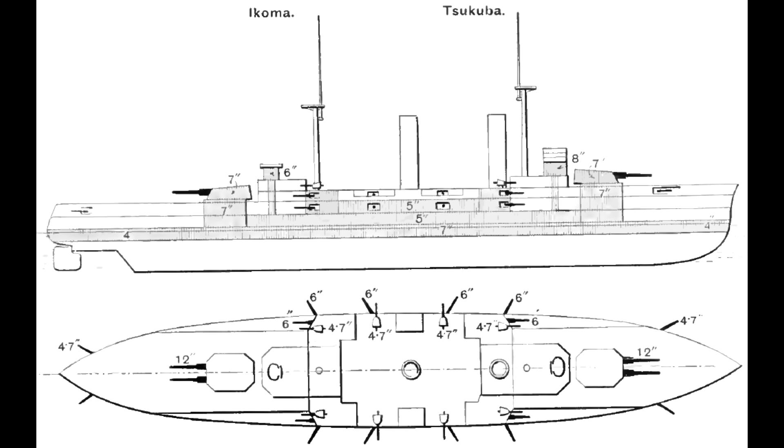Unlike the Japanese ships, though, which were very much simply larger and more heavily armoured cruisers, the US Navy design was labelled a fast battleship, and essentially traded off some armament, compared to the growing demand for all big gun designs, in favour of speed, with protection much closer to battleship than armoured cruiser levels. Imagine either an elongated Connecticut or a slightly less heavily armed South Carolina, for an example.

It was this latter idea which would gain more traction as the monster fleet proposal ran into the very real issues with political will and thus budget, and from 1904 through 1906, various options on the small fast battleship idea were sketched. Some were more like the Japanese Navy's enlarged armoured cruisers, others followed the more original elongated battleship concept.

As such, armament also varied, with some proposing a pair of twin 12-inch turrets, while the then Lieutenant Commander William Sims suggested a 23-knot ship with no less than 9 10-inch guns in 3 triple turrets.

However, as the true specifications of the Invincible class began to become apparent to people who weren't in the Royal Navy, views began to diverge once again, but now in completely different directions. In an interesting inversion of Fisher's justification for battlecruisers, some US Navy officers argued that an Invincible-style ship would be the perfect commerce raider, since the large numbers of smaller and slower protected and armoured cruisers used on overseas stations by most navies, and even some of the older battleships that were sometimes used there as station flagships, would be completely unable to deal with such a vessel tearing up the nearby merchant fleets.

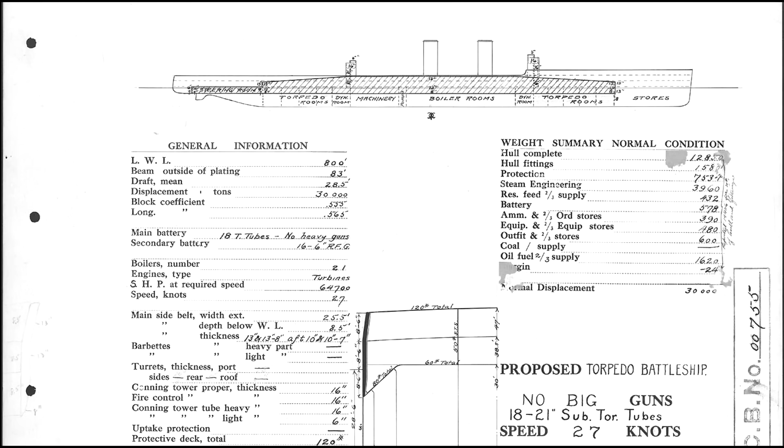Even the brief interlude of proposals for a large, swift vessel armed primarily with torpedoes, the so-called torpedo battleship, didn't change things that much, although it was concluded that the Invincible type was a better idea than the torpedo battleship, and both types relied on higher-than-average speed, but the Invincible could deliver almost as heavy a torpedo attack, plus it had the advantage of having big guns, and thus was more generally useful. It was, however, also asserted that a vessel with a still further reduced main battery and some more protection would be still more useful, and then you'd fallen back into armoured cruiser territory, and the US Navy wasn't building any more armoured cruisers.

Thus, advocacy for battlecruisers fell to the fringes of the US Navy officer corps until 1909, when, faced in part with clearer intelligence on how the Royal Navy actually planned to use its battlecruisers, plus the Germans starting to build their own and the Japanese Navy on the lookout for a design that suited their needs, and the Royal Navy, of course, itself continuing to iterate on the battlecruiser idea with new designs, the Naval War College finally decided that, in fact, the battlecruiser was a type of cruiser, primarily intended for scouting, screening, and pursuit of the enemy, rather than a type of battleship.

This statement of what to us might seem to be the blindingly obvious opened the gate somewhat once again, and coupled with news soon after of the keel laying of HMS Lion, a still faster and more heavily armed design compared to the 12-inch battlecruiser type, the US Secretary of the Navy soon began soliciting designs for potential battlecruisers from the US Navy itself. This came back in the form of half a dozen concepts that were designed to accompany the Wyoming-class battleships. They varied between 24 and 26,000 tons displacement, with 6, 8, or 10 12-inch guns in twin turrets, all with a speed of 25.5 knots and armour that varied between 8 inches all the way up to the 11 inches of Wyoming herself, usually with the number of guns scaling inversely to the thickness of armour.

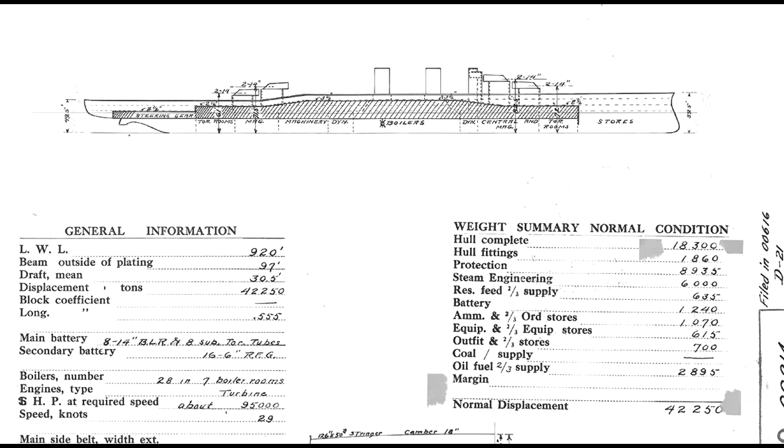This was to be trimmed down to 900 feet in hull length, with a range of 8,000 nautical miles plus the 24 hours at full speed, with a secondary armament increased from 5 inches to 6 inches on account of the fact it would be more independently acting, and it would have some torpedo tubes.

Attempting to fulfill this requirement yielded a somewhat shorter ship, although it was still 950 foot long, and weight actually ended up going up slightly due to the need for a more powerful machinery plant due to the somewhat lesser length-to-breadth ratio. Since this design only marginally improved the infrastructure issues, meaning that a single dry dock then being built at Pearl Harbor could just about take it, it was shelved.

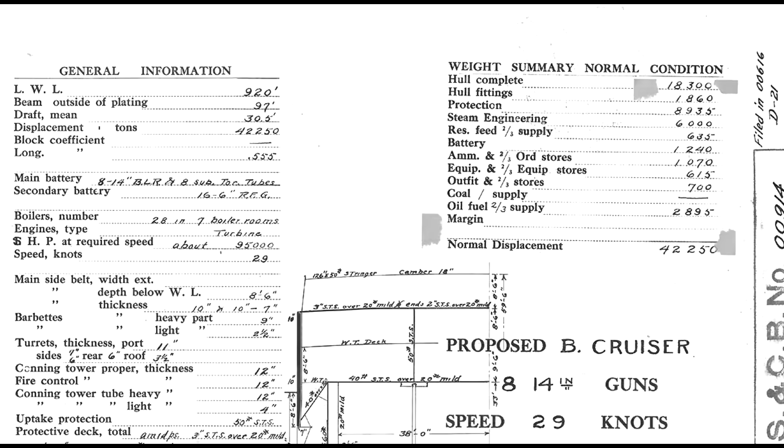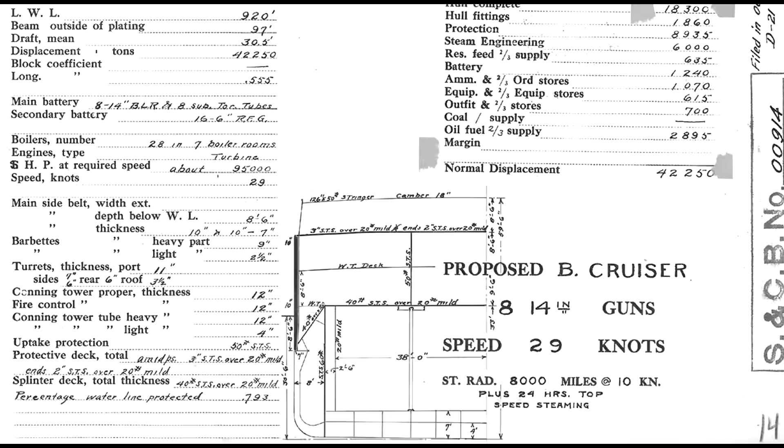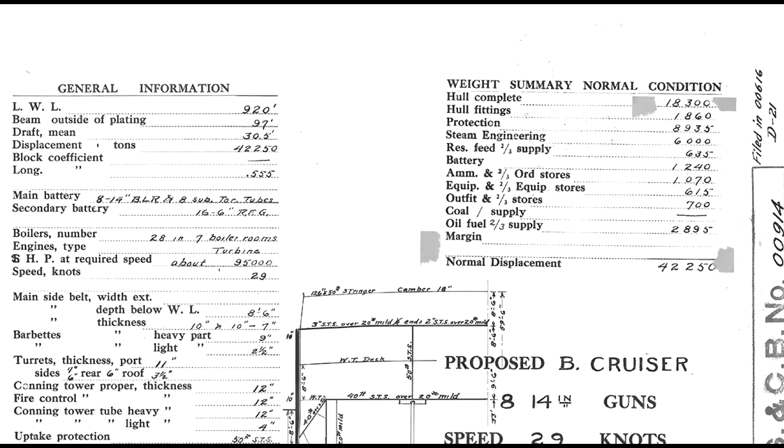One last sketch seems to have been made, which reduced the belt armour by 1 inch to just 10 inches, as well as some other small changes, which managed to drop displacement to just over 42,000 tons and length down to 920 feet, but this was still seen as far too large and expensive for the offered capability, and nothing further was done, other than a note left that the mission would shift from independent operations to long-distance recon and scouting for the fleet in the future, and armament of future designs was going to be either 10 14-inch guns, presumably in a Nevada-style layout, or 8 16-inch guns in 4 twin turrets.

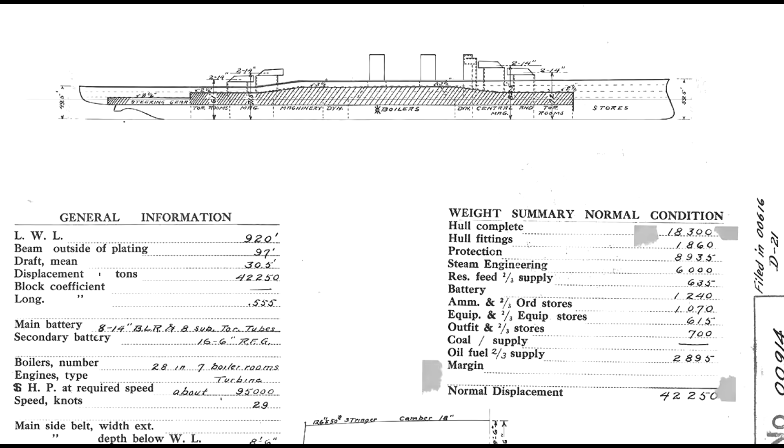Things died away a bit after this, but shortly after, World War I broke out, and battlecruisers were involved in many of the early actions, proving their capability of destroying smaller cruisers utterly. This made the US Navy's previous contention that fleet screens could be done by the cruiser fleet alone completely untenable, and the need for battlecruisers in said fleet screen became more and more obvious. Once more, the thinking split into 2 lines. In 1915, this resulted in what you might call the high and low-end designs.

At the upper end, there was another go at a full-scale battlecruiser, now armed with 8 16-inch guns. By significantly reducing the freeboard along the length of the ship, it was possible to avoid the need to make the armour part of the ship's basic structure, and so a shallow 13-inch belt between the turrets was tried, with a very heavy protected deck abreast the turrets and extending somewhat beyond them. The latter had 8-inch slopes and a 10-inch narrow underwater belt, while the 13-inch belt, as we said, remained between the superfiring turrets, over machinery for the most part.

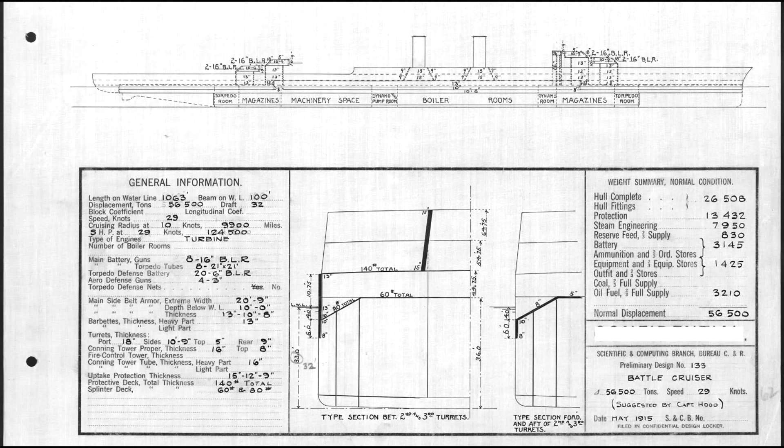Still capable of 29 knots, this new design came in at 56,500 tons and over 1,060 feet long. It was a couple of thousand tons lighter and considerably better armed than its most analogous predecessor in the 1912 design series, but it was still far too big and expensive.

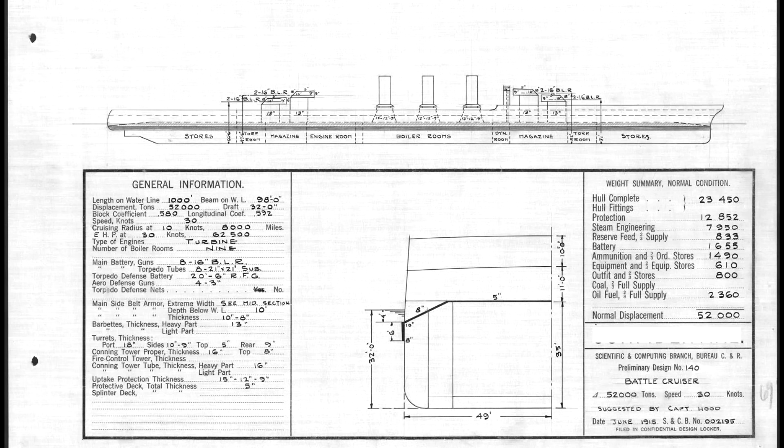An idea to abandon conventional belt armour entirely in favour of just running the heavy protected deck along the whole length of the ship, essentially making a gigantic protected cruiser, saved about 60 feet on length and 4,000 tons in weight, while pushing speed up by about a knot. But it was still far too large and had the additional problem of any hit on or above the waterline now being one that would potentially cause flooding, and at the very least some internal damage, and the ship lacked enough reserve buoyancy to stay afloat with just its underwater citadel intact.

At the lower end of things, however, was the idea of a battle scout. This had started off well in the cruiser category with a proposal for a top speed of 35 knots.

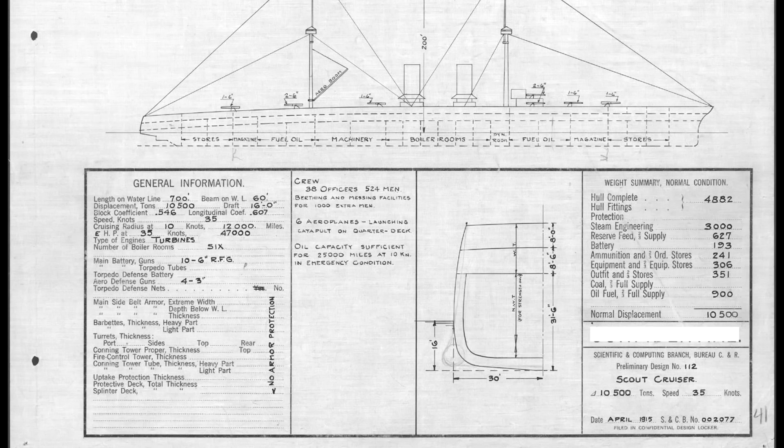And at the lower end of the series, there were designs of just over 10,000 tons with 6-inch batteries and armour protection that ranged from distressingly sparse to non-existent. But, as the near 3 dozen designs went on, displacement grew, and so did armament, with 4 12-inch, 14-inch, or even 16-inch guns considered as displacement headed up towards 20,000 tons, all with little to no armour.

As displacement climbed into the high 20s and even low 30,000s of tons, armament included up to 8 14-inch guns, and finally a degree of protection, between 4 and 8 inches of belt, depending on the design. Most of these designs were still aiming for 35 knots, although a few did drop this requirement to a mere 30 knots or so. At this stage, it was clear that the Battle Scout was beginning to converge with the full battlecruiser, and so they tried again with the Battlecruiser. However, the range requirement and the limitations of available boilers and turbines were again kicking the idea to the curb.

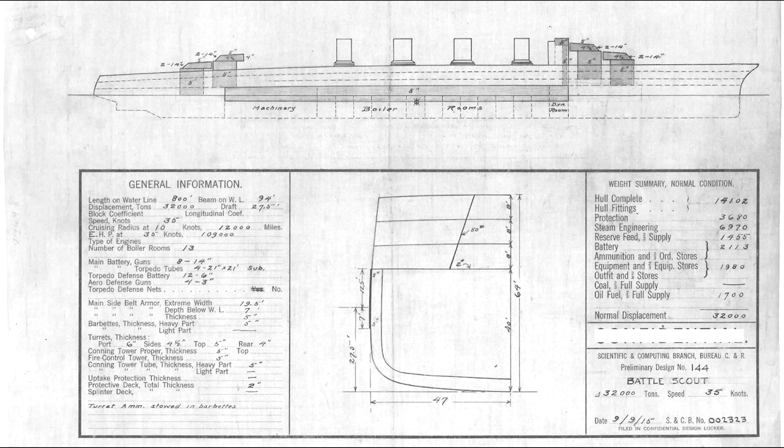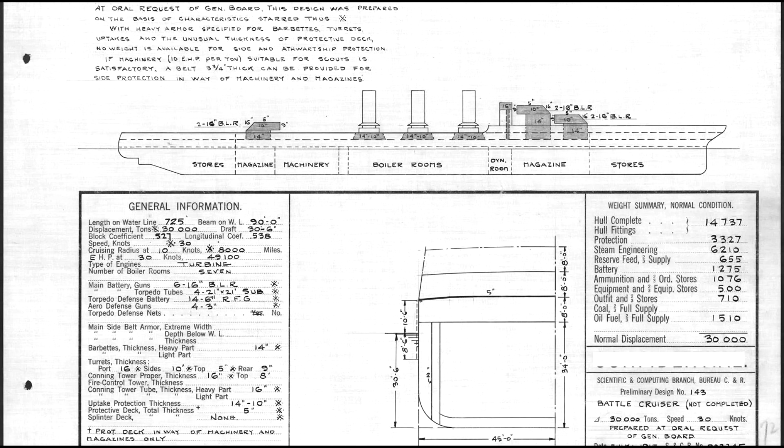On a similar displacement to US Navy battleships of the time, a design began to be drafted that aimed to be somewhat better than the approximately 27,000-ton HMS Queen Mary. An armament of 6 16-inch guns in 3 twin turrets was considered, with a 30-knot top speed and 5 inches of deck armour. Unfortunately, it turned out that with just that armament, the armour for the turrets, and the secondary battery in place, they ran out of displacement with exactly 0 belt protection.

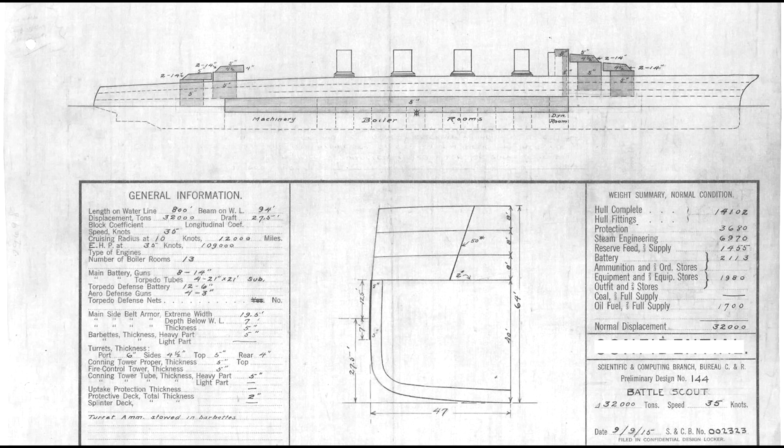Dropping the armament down to a roughly equivalent 8 14-inch guns and introducing a 5-inch thick belt, which would at least protect against light cruisers, still pushed displacement up to 35,500 tons. However, this general concept was still marked for further exploration, resulting in a 32,000-ton design which had 5-inch armour only over the machinery spaces, with a rather brave decision taken to abandon magazine protection entirely, thanks to storing all of the ship's ammunition in the barbettes, which themselves only had 5 inches of armour.

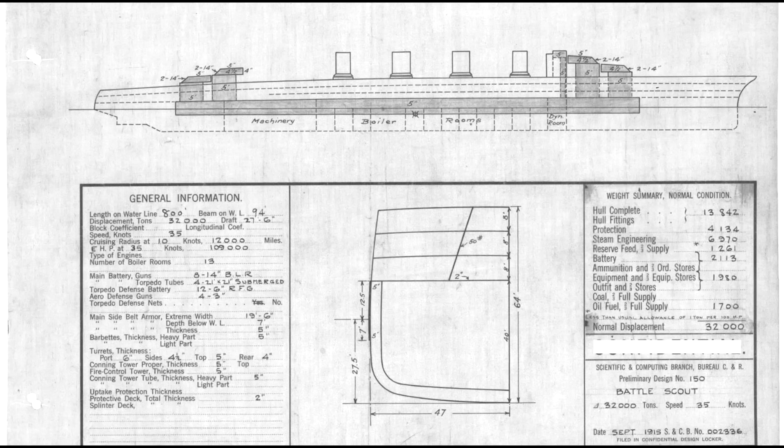Since this meant all the explosives were now well above the waterline and only behind 5 inches of steel, it was rather understandably hastily revised to include some underwater magazines, with the belt extended over them at the cost of significantly less reserve feed water and overall a more flimsy hull. Although the new magazines still only had 5 inches of armour, they were at least slightly harder to hit.

4,000 tons could be saved by switching from 14-inch guns down to 10-inch guns, or alternatively, if you stayed back at 32,000 tons, the use of 2 twin 14-inch turrets up front and a triple aft allowed the 5-inch belt to go all the way to the bow, while the use of a pair of quadruple turrets allowed a Gangut-style full-length belt bow to stern, although again it was just 5 inches thick.

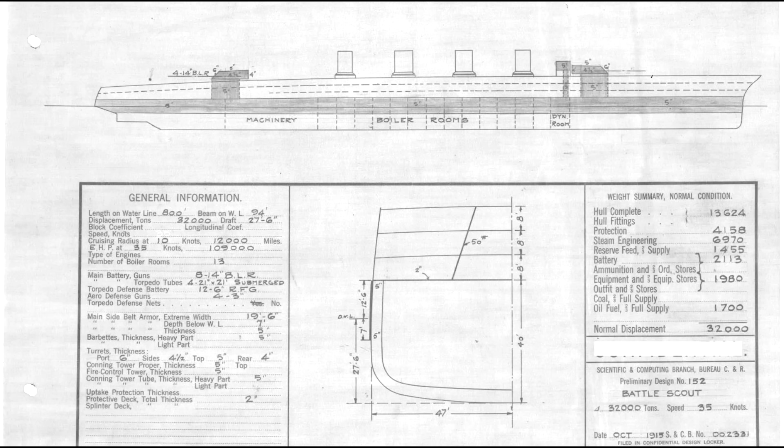From these ideas, it was decided to go with the design that had the 5-inch belt covering both machinery and magazines. They were still aiming for 35 knots, now at 33,500 tons, thanks to an increase in armament to 10 14-inch guns, with triple turrets superfiring over twins, a bit like the later Pensacola-class cruisers, and for similar reasons. This would be the design initially submitted as Congress finally opened its purse a bit in 1916 to massively expand the US Navy. Only for the Battle of Jutland to immediately call a halt to proceedings as people asked the rather reasonable question of if a 5-inch main belt was really going to stop the new US Navy battlecruisers from popping just as fast, or perhaps even faster, than 3 British battlecruisers just had.

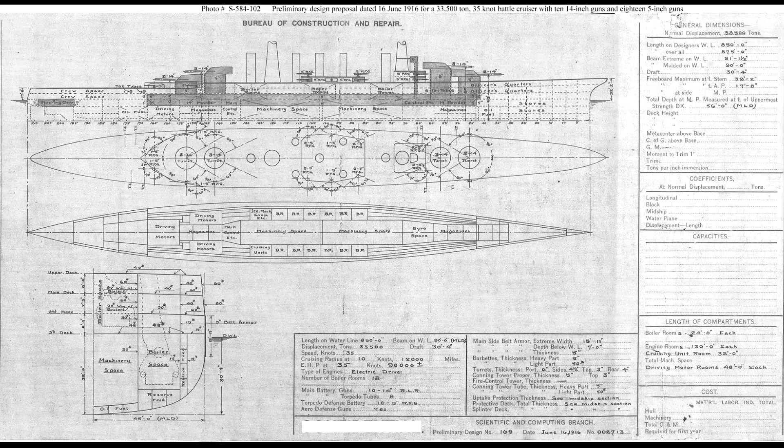The US Navy defended the design on the basis that the British ships hadn't died from lack of protection, but rather from poor ammunition handling practices. This was a somewhat dubious argument, given that the 9-inch belt of the later British battlecruisers had in fact protected them from some direct magazine impacts, and at least one British battlecruiser, Indefatigable, had sunk from what was almost certainly a direct or near-direct hit to the magazines, where 5-inch armour had rather decidedly, obviously, failed to save her.

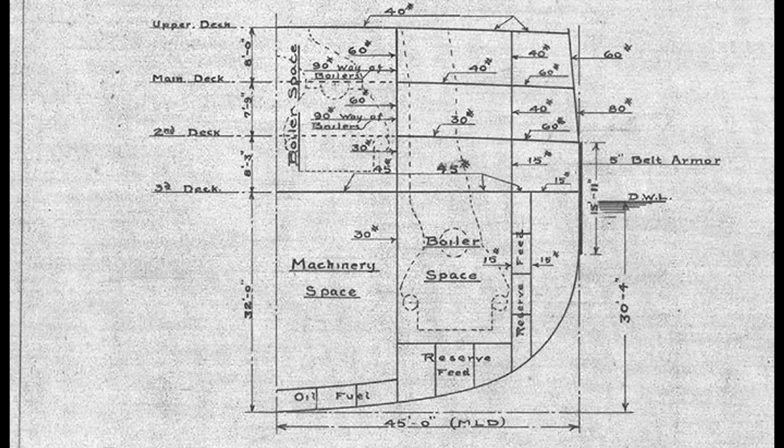The reason for the thin armour was entirely down to the 35-knot speed requirement. The massive machinery plant required for this, coupled with the choice to use turbo-electric drive, which took up more space anyway, meant that additional boilers were actually stacked atop the turbine rooms, meaning that boilers ran all the way up to the upper deck level, well above the limits of even the 5-inch belt, and thus directly vulnerable to even destroyer-grade gunfire, although the officers in charge tried to sell the idea as at least meaning that some of the boilers were immune to torpedoes, because they were too high above the waterline.

With the British eventually settling on both improving ammunition handling and significantly upgrading magazine protection where possible on existing designs, and more significantly on newer ones, the up-armouring of the under-construction Hood and the re-armouring a couple of years later of Renown and Repulse being examples of this, the final form of what was now being dubbed the Lexington class was now very much up for debate.

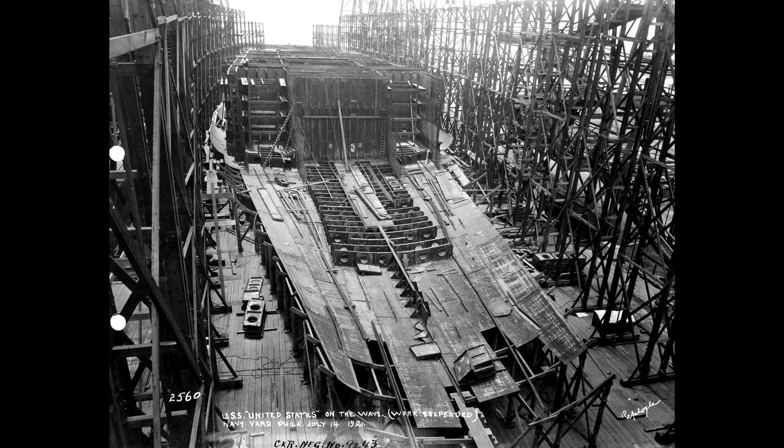The US entry into World War I the next year meant that work on the ships was suspended in favour of mass production of smaller craft, and as a result the design was able to be revised a number of times. This presented both opportunities and challenges. Strong pressure was exerted to increase the main battery from 14-inch to 16-inch guns, with some considerable debate as to if this meant dropping the number of guns from 10 to 6, which would also mean losing a turret, or from 10 to 8, which would mean having 4 twin turrets. The latter idea eventually won out.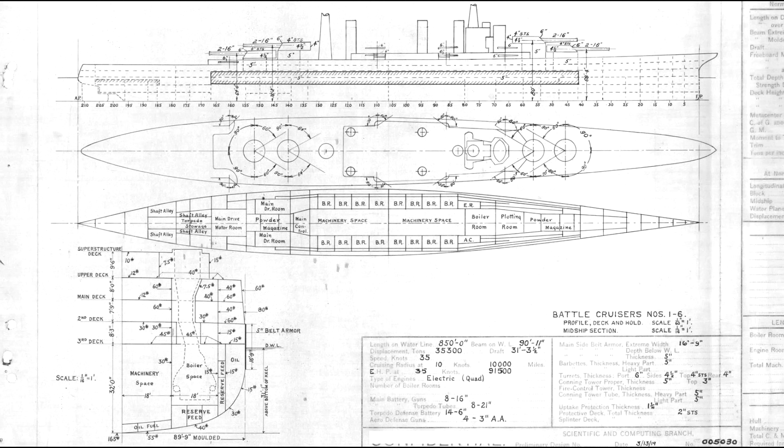At the same time, using newer boilers with small tubes meant that the number and size of boiler rooms could be reduced, which brought the machinery fully under the armour once again. This also meant that the ships only needed 5 funnels instead of 7, with the overall cost of increasing the armament while decreasing the weight of the machinery meaning that just under 2,000 tons more displacement was needed, with the design sitting now at just over 35,000 tons.

It was briefly considered to try and up the armour belt to 9 inches, which, at least at the longer ranges promised by the new 16-inch 50 caliber guns, might provide some protection against smaller shells, and it was also thought maybe we should actually have some torpedo defences. But this would drop speed to 33 knots and increase displacement to around 45,000 tons.

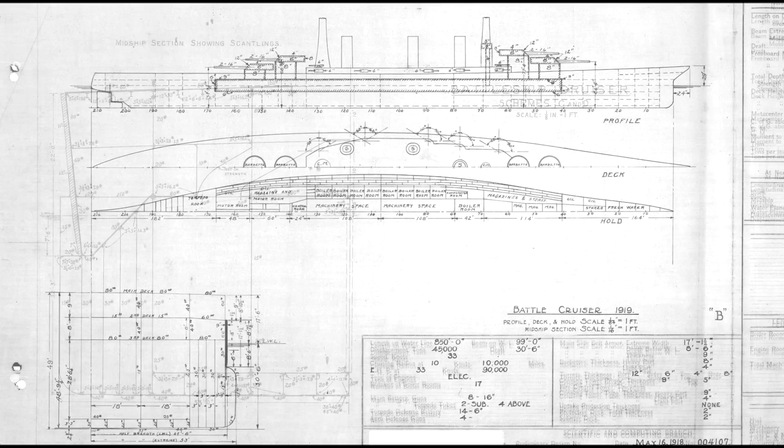Then, in 1918, Stanley Goodall showed up, a British naval architect and later director of naval construction, and he quickly showed the US Navy how Hood was designed. Impressed at battleship levels of firepower and protection with battlecruiser speed, the US Navy used his expertise to design their version of what they saw Hood as, a meeting of battleship and battlecruiser.

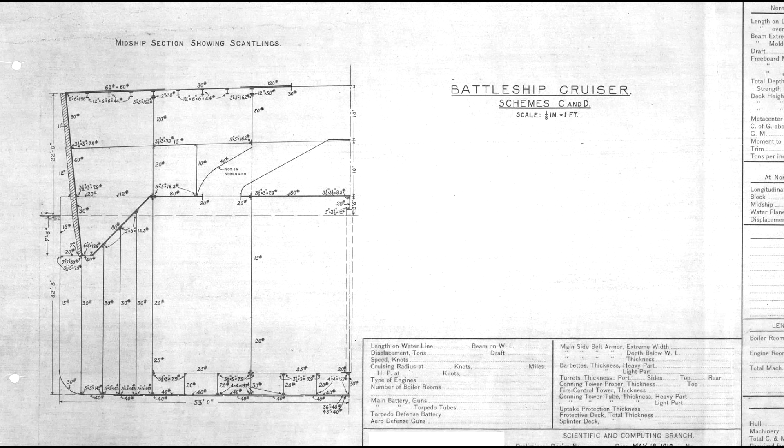The result was a proposed successor to the Lexingtons, with a baseline design that called for the same armament as current battleships, with a maximum acceptable armour reduction compared to those battleship designs of 10%, with the ship capable of 30 knots of speed. Using turboelectric drive, Goodall's concept of angled belt armour of about 11 to 12 inches of thickness almost matched the 13.5-inch vertical belt of US standard battleships, and the 1920 South Dakota's dozen 16-inch guns were added to the ship to give 2 designs, one of 48,500 tons and another of 53,000 tons, the main differences being length and fine details of the armour layout, but these weren't proceeded with as post-war economies began to bite.

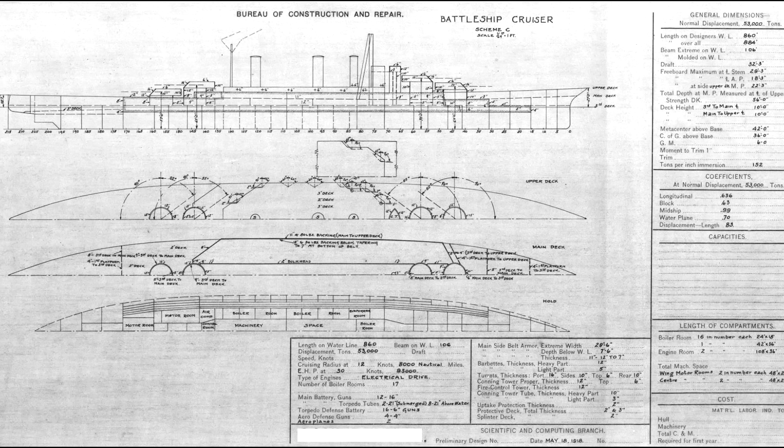The US Navy also tried to argue, based on this visit's experience, for uprating the Lexington's belt armour thickness, which at this stage was still just 5 inches. The General Board refused any increase at all, claiming that they saw no advantage to it, given that it would almost certainly mean the ship would have to abandon the aim of 35 knots of top speed. But the US Navy's officers were growing increasingly concerned. The now Admiral Sims argued that the Lexingtons should be redesigned with Hood's 12-inch inclined armour, and he wasn't alone.

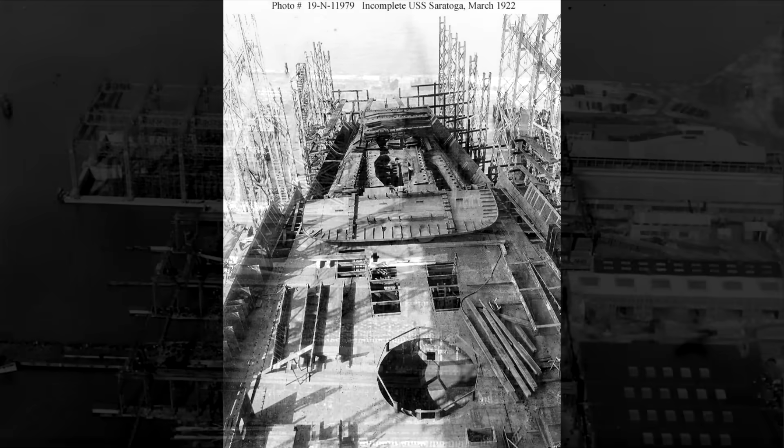Eventually, in early 1919, it was decided to suspend further work on the Lexingtons to allow a full, considered discussion and debate about everything that had been learned since the 5-inch belt version had been signed off on. The General Board and the Bureau of Ordnance stuck to their guns, but eventually a compromise was forced. The Lexingtons would have even newer boilers, allowing the funnels to be reduced once more to just 2 large trunked units, and armour would be increased to 7 inches at a mild slope, along with a little bit more deck armour. This meant that target displacement would rise to 43,500 tons, and speed would drop to just over 33 knots.

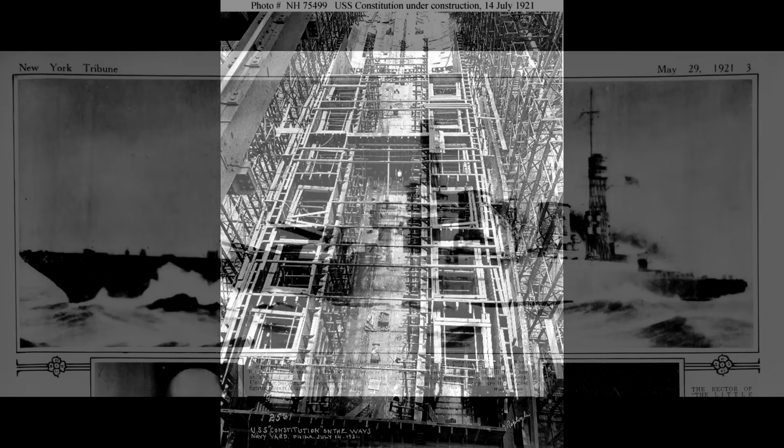But that would mark the end of US Navy battlecruiser development, for the Lexingtons would be cancelled as a result of the Washington Naval Treaty, with Lexington and Saratoga instead being converted into carriers, drawing down a curtain on a rather interesting set of potential developments that had some good ideas, and honestly, some downright terrible ones as well.